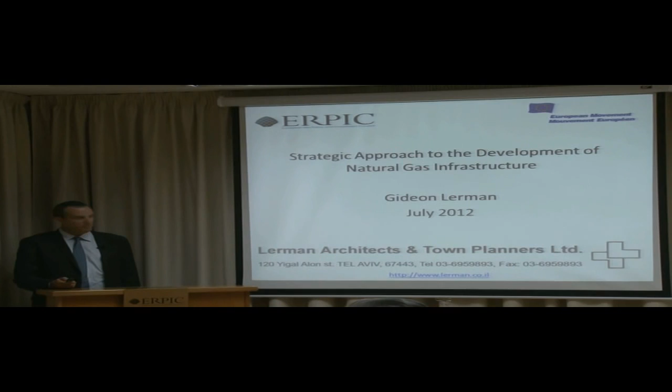Introduced, I'm Gideon Lerman. I'm managing, and I will talk a little bit about the company, Lerman Architects.

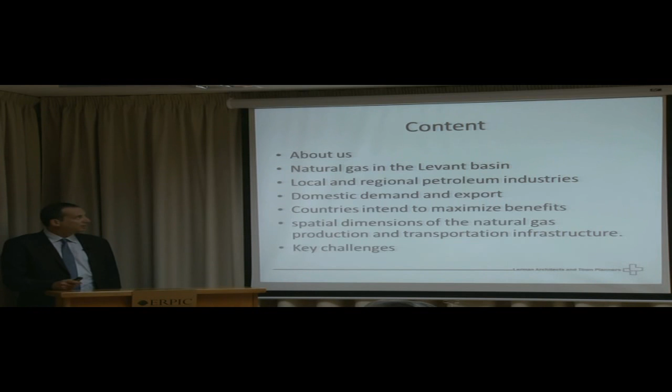The natural gas discoveries in the Levant Basin, local and regional petroleum industries that are developed, the domestic demand and exports, and spatial dimensions of the production and transportation infrastructure.

Lerman Architects was established in the 70s. Our expertise is master planning, spatial planning, infrastructure planning, and strategic development. We are a firm with expertise in consulting to government agencies, government ministries, World Bank, infrastructure development agencies, real estate developers, municipalities, NGOs and industry. We deal with the strategic plan from the place of the idea and how to take the idea and physically

promote it to show that it's becoming a reality on the ground. And we also deal with architecture. The firm was established by my parents, who are architects, and they deal with architecture and structural planning for many years. You can see some of the projects we were dealing with.

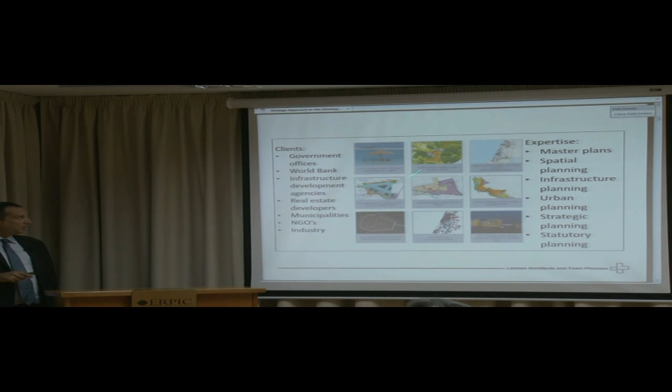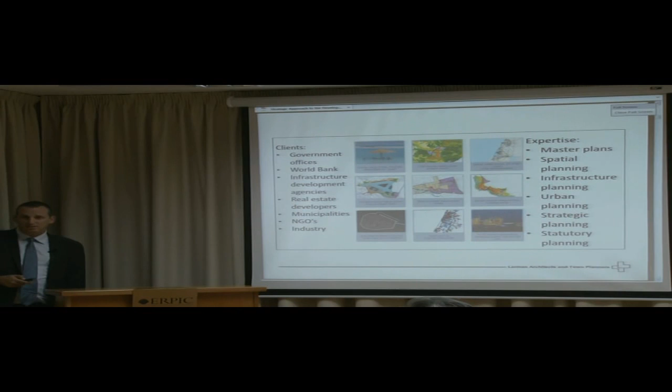Some of the projects we're dealing with are developing airports, like the Ben Gurion Airport, and ports, like the port of Ashdod and the industrial area behind it. I was recently managing a project for the World Bank in Albania, developing a strategic development investment plan and statutory planning for 4 municipalities. We have a development policy for the Dead Sea area. We made a big project on artificial islands offshore Israel. And recently, of course, the gas discoveries in Israel, where we are managing a multidisciplinary team in this field.

As we see, you see several of our projects. As architects, we also design industrial parks, hospitals, etc.

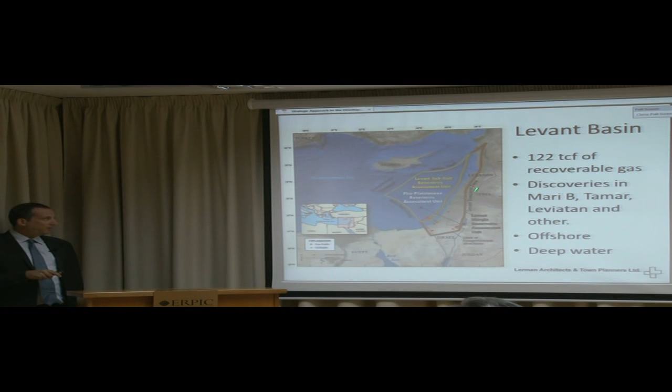I'll talk a little bit about the Levant Basin. Recently discovered, the USGS has found that in the Levant Basin there's about 122 TCF of natural gas. This is the recoverable deposits in this area. The majority is in Israel, some in Cyprus and in Lebanon.

In the vicinity, we have to remember there is another basin with proven reserves in Egypt, which is much larger, and two other basins - one entirely in the economic zone of Cyprus, which has not been explored yet, and the Mediterranean Ridge Assessment Unit, which has not been explored as well.

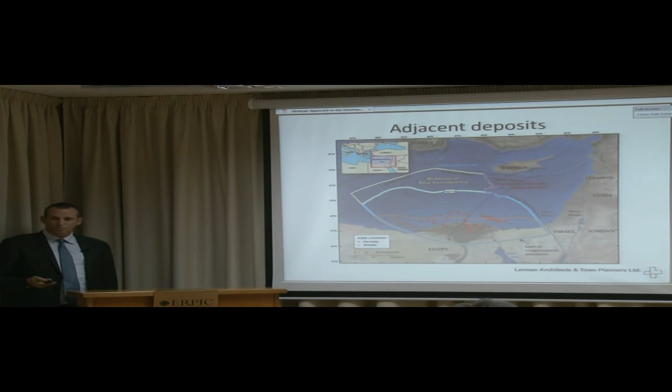What we see is that all this area between Cyprus, Egypt, and Israel has lots of gas deposits recently discovered. There are proven deposits both in Egypt and in Israel, and some discoveries even declared in the Cypriot economic zone. The main characteristic of the gas in the Levant Basin, not in other basins, is that

it's ultra deep water wells. Most of them, as you see, Tamar is about 1,700 meters deep, a well of natural gas. If you remember the Macondo well in the Gulf of Mexico, which is an oil well, it's basically the same depth.

And this is a very complex engineering challenge to utilize the gas coming from this deep water. You need a subsea completion, which is a system underwater, built by robots, using the wellheads and the manifolds that take the gas from the wells to the processing units elsewhere, which are tieback, being located far away from the wellheads.

High pressure of the natural gas and high temperature requires some management, because it's difficult to reach this high pressure to bring it to the shoreline. This high pressure becomes lower and lower in the future, in a few years, because the reservoir starts to deplete. But in the beginning, we're talking about very high pressure.

Capital investment in the beginning is quite high, which is another remarkable characteristic of these discoveries. And the good thing about this discovery is that it's quite good quality gas. From what we know of the gas composition of Leviathan, Mari B, and Tamar, it's very good quality gas. What we mean is there's a low percentage of carbon dioxide, low percentage of CO2, and the gas is considered dry and sweet, which is a good sign for gas.

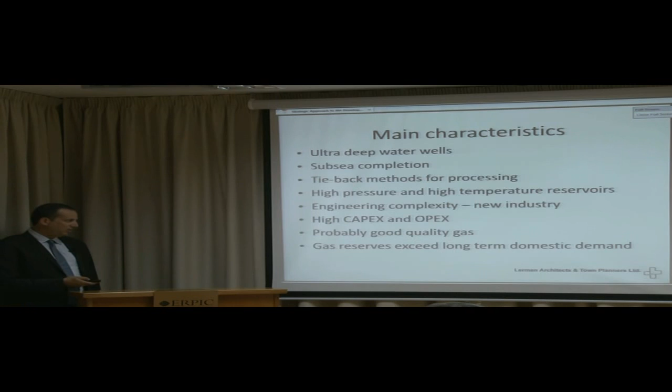The gas, basically, if we're talking about an analogous field, Norway is a good example. Norway doesn't use gas for domestic demand. All the gas it exploits is for export. All their energy comes from hydroelectrical power, so it's a nice example.

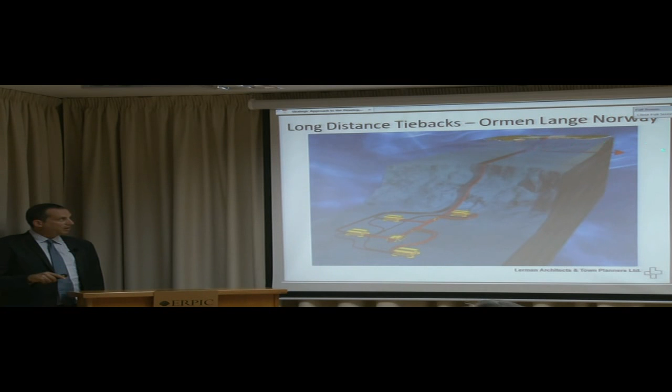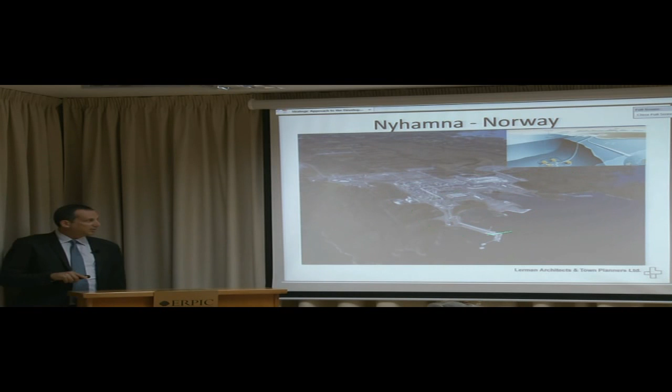The gas is in deep water in the subsea completion, then it goes to a facility which is onshore, and from there gas is exported by pipeline to England and to the European grid. This is the processing facility at Nyhamna in the center of Norway on the coastline, and this is the structure of how it looks like.

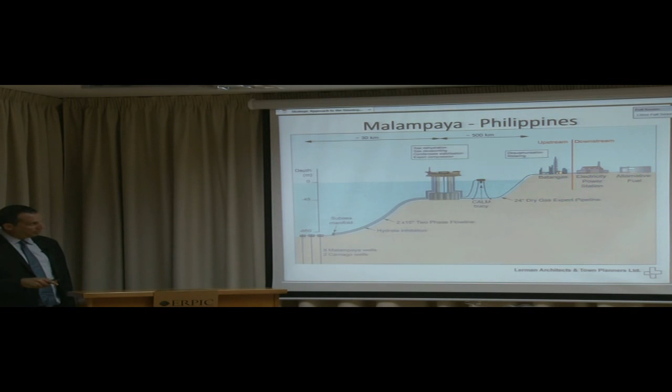This is also a characteristic structure of how this system is being developed upstream and downstream. What we call the subsea completion, which is the wellheads - this example is in the Philippines, but it's the basic structure. Then you have the manifolds, which you saw earlier, and pipelines going to a processing facility, then to finish processing, usually onshore. From there it goes to consumers - in the case of the Philippines, domestic consumers, electricity, and alternative fuel.

What is the processing facility doing? Separating the natural gas from the water and condensate that come along with it. It's a very simple method of treating the gas, which is dehydrating it by cooling, heating, recooling and reheating to meet the sales specification for domestic demand.

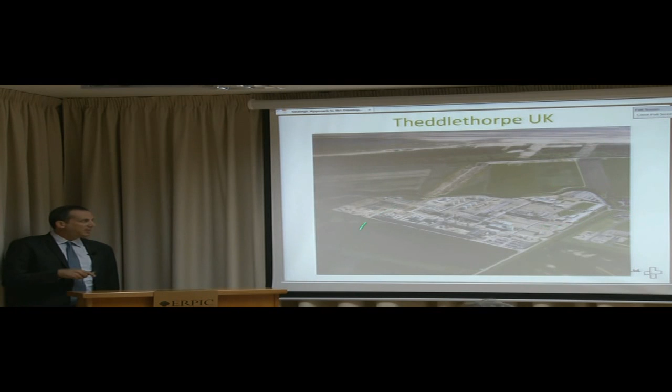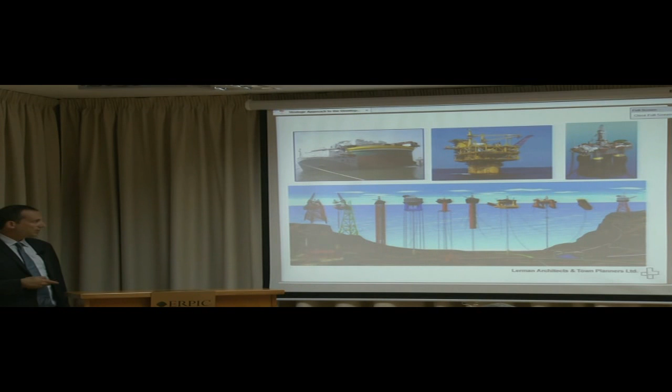Offshore, we have lots of examples of how to process the gas. Drilling or processing facilities are located on platforms, which can be floating or connected to the sea - Mari-B in Israel is this kind of platform. In the Gulf of Mexico, many platforms are in deep water or ultra-deep water and used for drilling - for that, facilities like TLP or spar are used, made for deep water and anchored. Some shallow water platforms use a jacket standing on solid ground. So these are all kinds of facilities used offshore for processing.

This is an example of a field developed for export, a classical example in Pluto, Australia. Australians export to the Far East, where they get the highest prices for natural gas, and they have LNG facilities. You see the wellheads and manifolds offshore, coming to a riser platform, connected from there to the LNG and gas processing facilities onshore. You can see it on the map, basically where it is - it's quite a large development.

The industry in the eastern basin of the Mediterranean is composed of several companies. Here you see Cyprus and the blocks being explored in the economic zone of Cyprus, and also Israel. Noble Energy is one of the main companies extracting gas, along with Delek, Avner, Ratio, and other major companies. In Egypt, you have Shell, which I think was also involved in Cyprus in the past, and BP and other companies working in the Egyptian offshore gas industry.

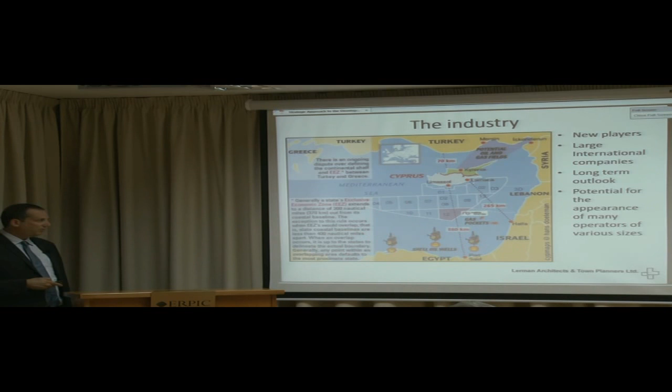The domestic demand is one of the needs - most countries use natural gas for domestic demand, first for power generation. I think Cyprus also thinks they need it for power generation. If there is industry that wants to use the gas, it's much cheaper than using electricity, or for steam or other uses - so they use natural gas.

Also, natural gas can be converted to methanol and DME, other materials very efficient for good industry, and it can be used for transport. CNG can be used for private cars - in many countries it's being used for private cars, and it can be another demand in the domestic market.

In northern countries they use natural gas for heating - every house is connected to a natural gas pipeline in the Netherlands, Canada, and parts of the UK and the US. But I don't think this is the case in Israel or Cyprus, that it's relevant, because it's mainly for heating.

The development for domestic demand requires a transmission system to transmit the gas from the processing facilities throughout the country, so the demand can be spread along the country, and a distribution system that connects the transmission system to the customers at lower pressure of gas. The receiving stations are the stations that process the gas, as I showed you before.

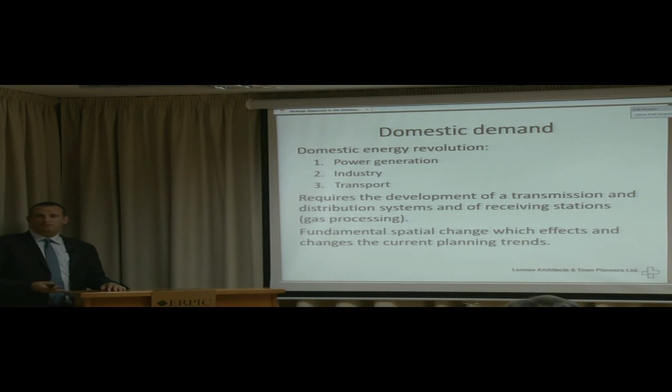As in Israel and in Cyprus, the meaning of the recent discoveries is a fundamental change of the spatial planning system and the planning development that we know today. There's infrastructure for water, electricity, and roads, but not for natural gas, which is hazardous material and has to be considered as such when you develop such a network. It has its own implications on the actual planning in every area. The planning today does not correspond with the needs and requirements of natural gas, and it's a major issue of consideration in the planning process.

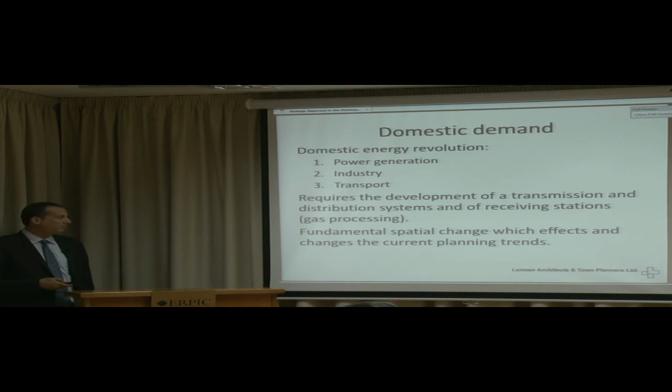So what we have is large corridors of the transmission system and flow assurance facilities. You need to keep the pressure. These are other facilities that you need to find land for, and to see what other uses are around them so there won't be risk to adjacent uses. Also facilities for reliability and redundancy. Natural gas is unlike diesel fuel or coal, which you can store very easily - it's much more complicated to store natural gas for the domestic market. There are also storage facilities, usually underground, in depleted natural gas or oil deposits, which can be used as storage - you pump in the gas so you can use it when you choose.

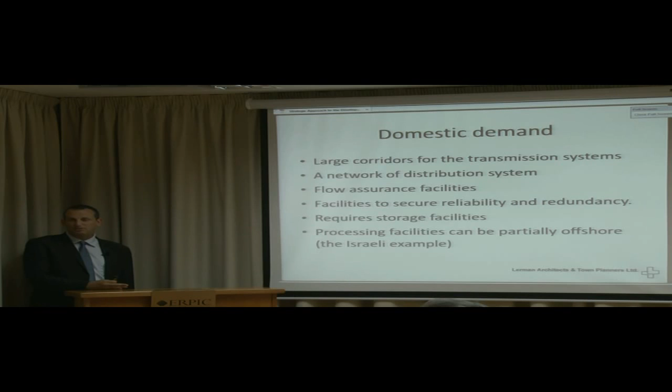Process facilities can be partly offshore. Now I'll talk about the Israeli example. Usually process facilities that take the gas and utilize it, as I showed you before, are done onshore. In Israel, because of public reaction to the attempt by Noble Energy to process the gas onshore, the government decided to explore the ability to process the gas offshore. This is the project that I'm managing.

The natural gas transmission system in Israel is as follows: gas comes either from Egypt today through a company called EMG, or from the Tamar platform managed by Noble Energy, basically at the maritime border between Israel and Gaza. These are the two discoveries that, since 2004, have been actively connected to the Israeli transmission network. Some of it is existing - marked in yellow - and some is planned and under construction these days. There's about 400 kilometers of transmission system, a high pressure system at 80 bars, some of it offshore and some onshore.

From it, there are stations - power stations that take the gas to use for electricity, and pressure reduction systems to connect to industry and other uses. The plan we are doing includes two additional entry points, like the existing ones in Ashdod and Ashkelon, in the northern area. Because of the length of the system and the length of the Israeli state, we need to put a parallel capability in the northern area of the country to supply reliable and available gas for the long term.

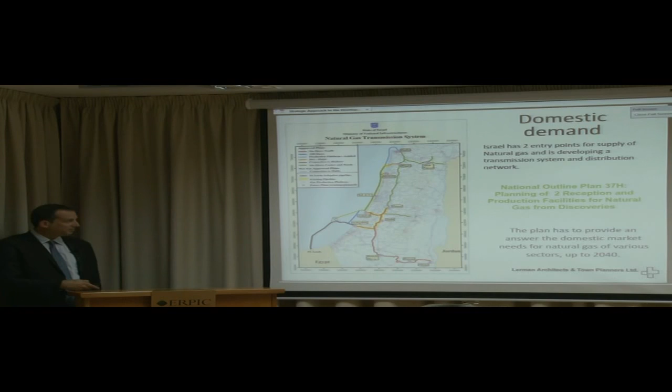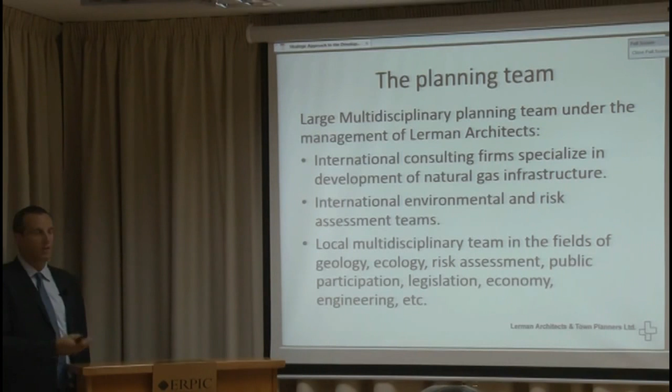The aim of the plan is to provide, for the next 30 years, a reliable and steady supply of natural gas for the domestic market. The planning team I'm managing is a very large, multidisciplinary team composed of international and local consulting firms covering various issues, from engineering aspects to environmental aspects - we are doing an environmental impact assessment of the project, a strategic environmental assessment, and we also have PR and public participation experts as well.

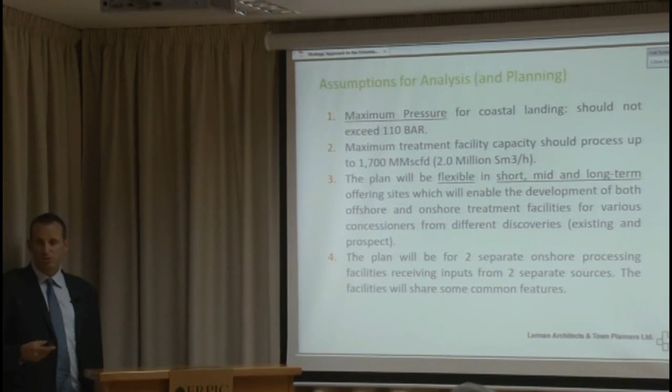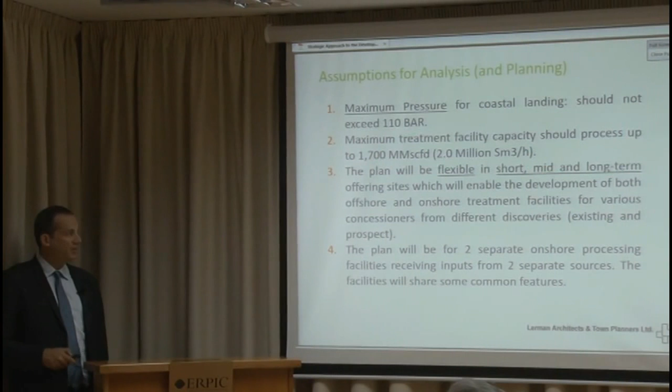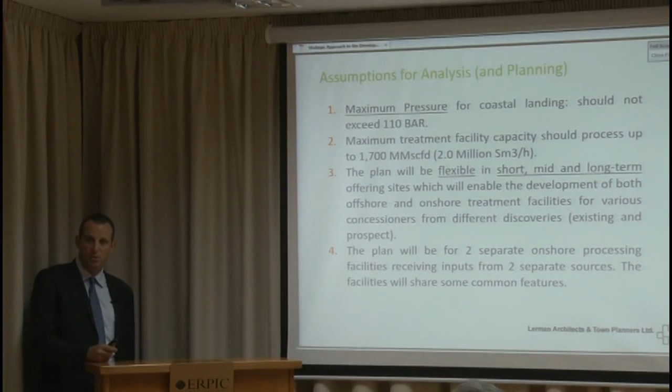The conditions we used for the planning are that we control the pressure offshore because it's high pressure - we control it offshore because of the public outcry over trying to bring high pressure gas to shore, which is the main risk factor in natural gas treatment. We're talking about a very high capacity gas processing facility, capacity of 2 million cubic meters an hour - about 48 million cubic meters a day. It's roughly one of the largest treatment facilities in the world of this capacity. So we're planning for this capacity as an upper threshold for development in Israel.

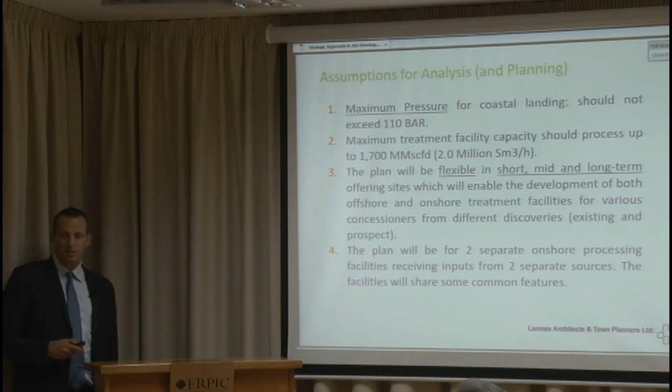We're looking at a plan that will deal with current concessionaires exploring and drilling offshore Israel, and future concessioners—everyone who finds gas and tries to utilize it in the next 30 years. They will have an answer from a statutory point of view of where to put the facilities, how to connect them with pipelines, and how to distribute for the domestic market.

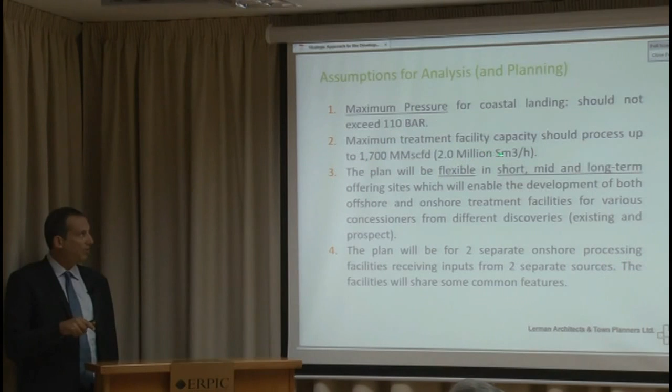We're talking about 2 separate facilities for this kind of capacity, and I will show you basically what we're talking about. Each one of them is for more than one concessionaire.

You need a flare area to vent the gas if you need to, in case of some emergency.

The condensate is an essential part of processing the gas, because if you don't have enough storage facility for this condensate and you cannot market it to the industry, then you have to stop processing the gas because you can't utilize it.

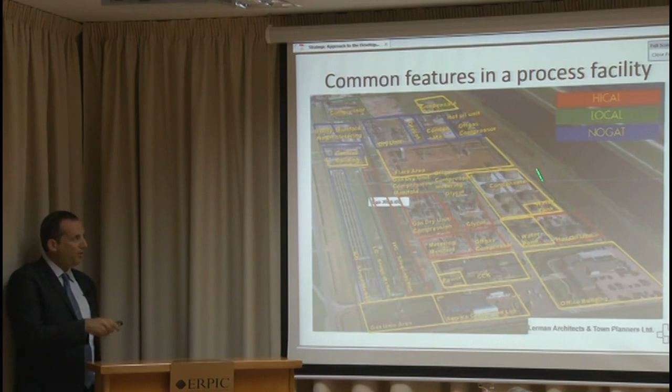The plan will supply the treatment for all the pipeable products. It also covers produced water—the gas comes with water, and you have to dispose of it. And the amount of condensate, as I said, can be pretty high—about 100,000 barrels a month for this facility.

That's quite a lot. These are examples of the facilities we are planning offshore and onshore. The facility could be planned entirely onshore; however, because of the public outcry and the density in Israel, we are looking at offshore options for processing.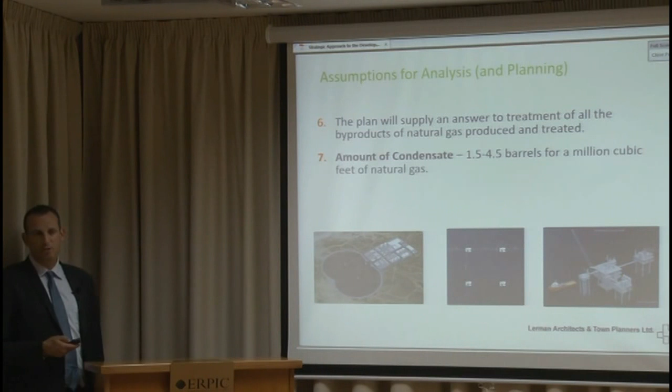It's quite unique. Most countries that do offshore processing do it purely from an economic point of view, not because of pressures from the public. In Israel the situation is different. Israel is not the only country doing this, but this is the solution chosen for Israel.

So we made this solution as a schematic outlook. There are the gas discoveries, for example Tamar or Dalit, which is a much smaller field, located far from the territorial water in Israel. The legislation system in Israel differentiates between the territorial water and the exclusive economic zone, which are 2 different legal entities, so we deal only in the plan with the area within the territorial water.

Every concessionaire who finds gas can be connected with the corridor to the facilities which are offshore and can do partial treatment. From these facilities, we will go onshore to complete the treatment in the most reliable way, in certain designated areas. This onshore area, because it's partial processing, doesn't necessarily have to be on the shoreline.

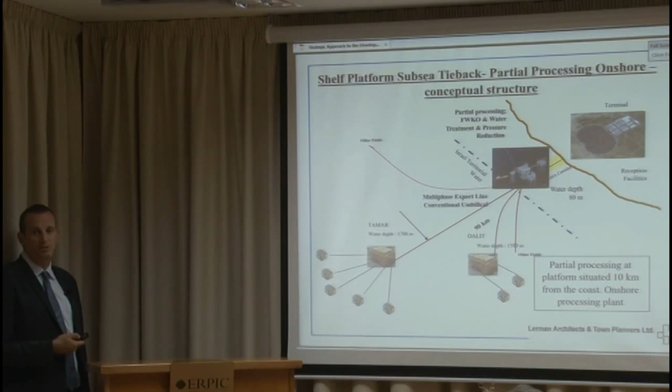It can be even 10 kilometers east of the shoreline, even more. The question is whether you can find the right corridor to put all the pipelines between the coastline and the facility inland—and it's possible. It's not possible in the case of LNG, but for processing gas for domestic use, it is possible. We looked at several alternatives of locations.

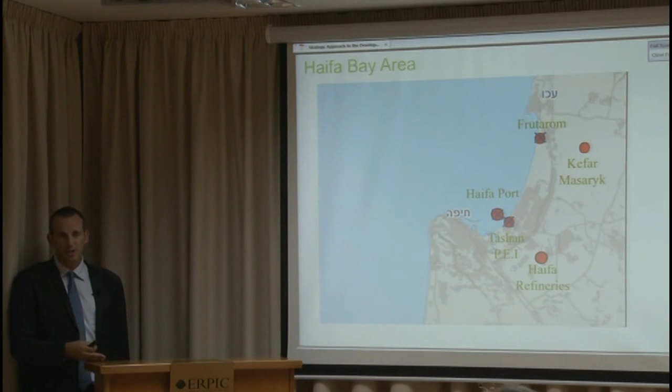One issue the residents consider very important—and as I said, this plan was originally made by Noble Energy, and because of the public outcry, the government took it under its responsibility, and I was nominated to manage this plan. So the first thing we did was start evaluating other options, in case the ones Noble selected were not the best. So we started looking at and eliminating options suitable for gas processing facilities all over Israel.

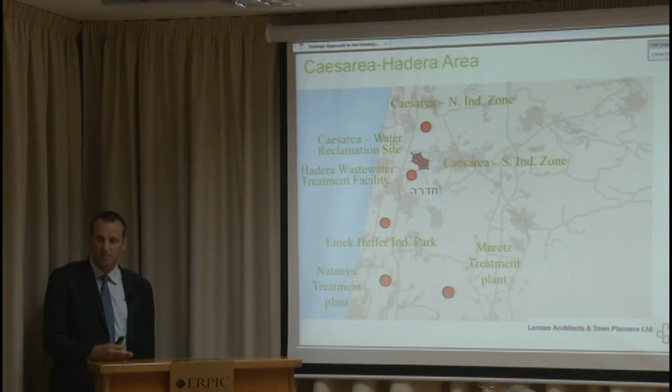We tried to look at about 25 facilities. Now we've downsized it to 4 that are going for the environmental impact assessment. However, we started with 25 facilities.

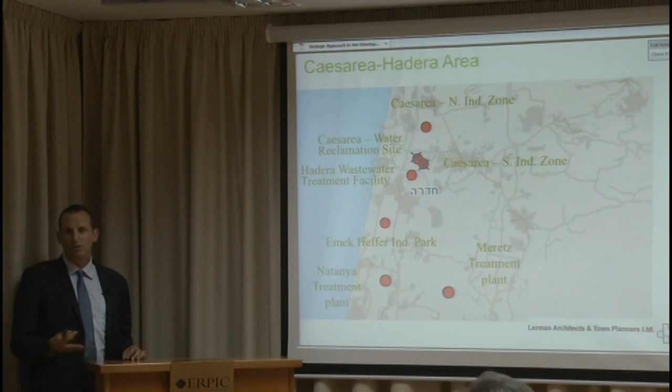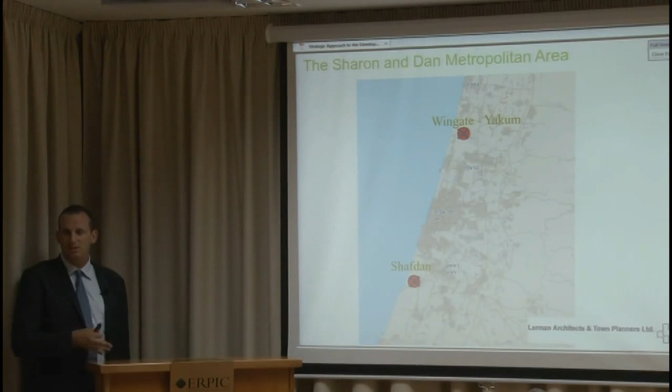We didn't say there's one facility which is the best, because from a judicial point of view, the court ruling is that the plan has to consider alternatives. This is an important issue, and that's why the court was supporting the residents against the development made by Noble Energy. So we looked at several facilities, then started considering offshore options.

It's not simple at all to put offshore structures. You have to see if the soil is stable enough. In the coastline of Israel, the Levant Basin is not stable.

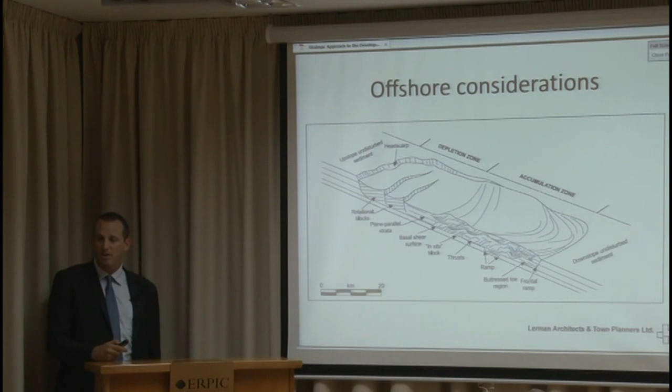What is happening is there's a salt layer. The gas was basically condensed beneath this salt layer that holds it and keeps it as deposits. All the deposits we're talking about in the Levant Basin are pre-salt deposits, under an underground salt layer.

This salt layer can be pretty thick — in Leviathan it's about 1 kilometer thick. Oil in the world is usually found beneath the soil, beneath the salt. The salt is the material that sealed the ground millions of years ago and doesn't let the gas evade to the atmosphere.

However, after the salt layer was developed, clay layers and sand layers were laid on the soil, and these layers are sliding all the time, becoming deeper and deeper in areas further out. We can see this here.

So putting a facility on a platform with 4 legs in an area next to these slides will make it fall down in the first earthquake, like we saw 3 days ago. It can fall down, and it's a very challenging engineering issue.

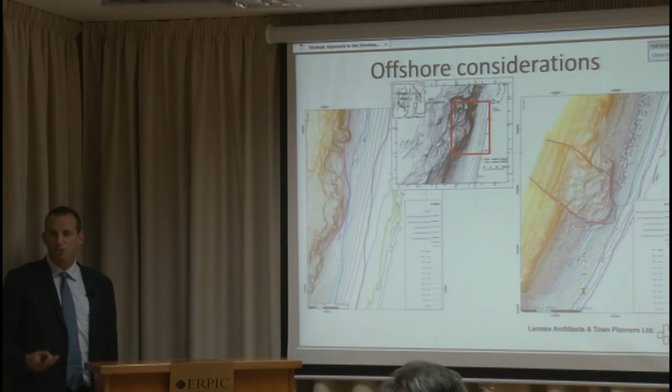This is for domestic use. We made a map of areas that are more risky — you see them in red, and in yellow less risky, and of course close to the shore it's much less risky for putting gas facilities.

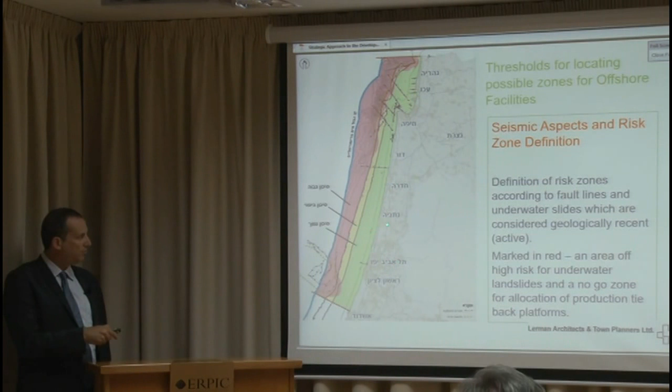However, the gas processing facilities are quite big, and they need some safety distance between them and other offshore activities like sailing or maritime paths. So you don't want to put them next to the shoreline — you want sufficient distance between the shoreline and the facilities.

That's why we were looking at several areas about 7.5 kilometers from the shore, and not in the area marked in red, which is dangerous for offshore facilities. We were selecting several areas for more detailed evaluation.

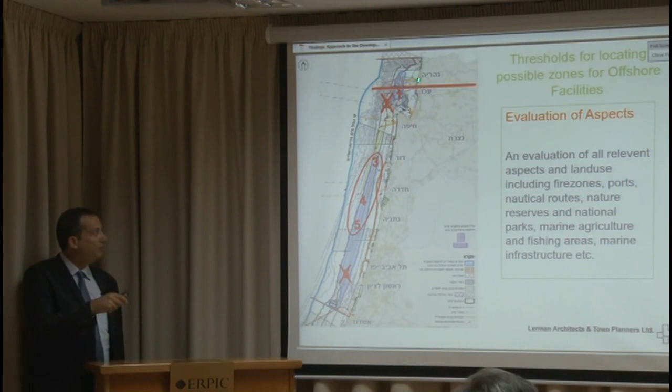If possible, we will finally select 2 of the 4 sites mentioned in this area for offshore facilities. This is the main delay of this project today in Israel — finding if these areas are suitable to hold offshore processing facilities.

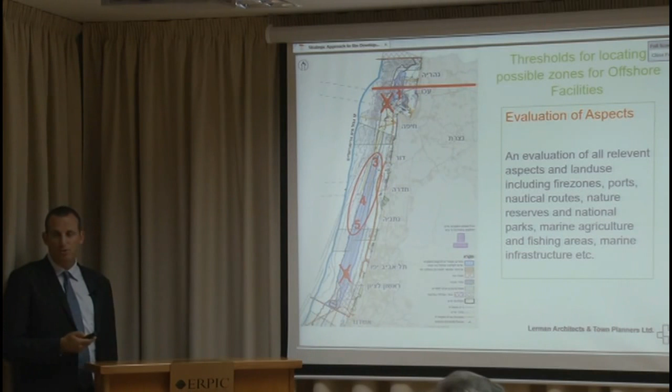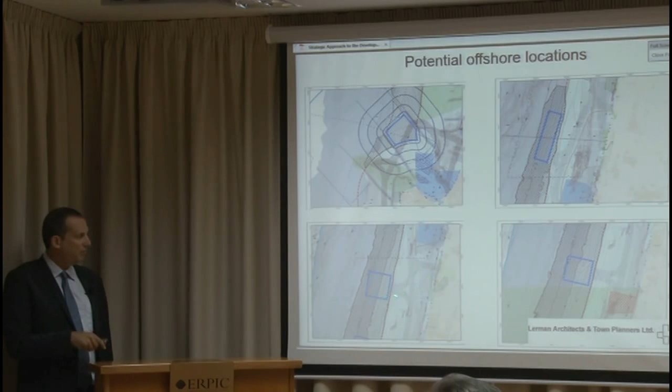It's a small artificial island that weighs quite a lot. This is a map of how you put these facilities and connect them with pipelines from the facility to the shoreline. So these are the areas we are now considering for offshore.

If we're talking about export, export is more complicated than domestic use. You have to explain why you need to export it, and understand what the decisions and conditions for export are. This is the Tzemach committee in Israel that sets the conditions for what is allowed to be exported, and under what conditions.

Not everything is exported from Israel — I'm talking from the Israeli point of view. Some is exported, some of the gas will be used for the domestic market. The Tzemach committee says you have to assure that domestic demands will be answered for the long term before you can start developing schemes for exporting natural gas.

Exporting always has some effects on the domestic market. Either, like in Egypt, the export is from the domestic market - the gas, the transmission system provided Israel with gas. Not now, but until a year and a half ago, Israel was connected to the Egyptian transmission system.

Another issue is small field policy. It's not dealt with directly today in Israel, but in the Netherlands, Norway, and other countries it's a very important issue. If you find a big field, it's very profitable to export. But what happens with concessionaires who find a small field? It's ultra deep water, high capex, and you need to find how to utilize the small fields rather than give them up, because 6 or 7 small fields are like one big field. If we look at the Gulf of Mexico, the North Sea, West Africa, or Australia, after you find some big fields, you find quite a lot of small fields.

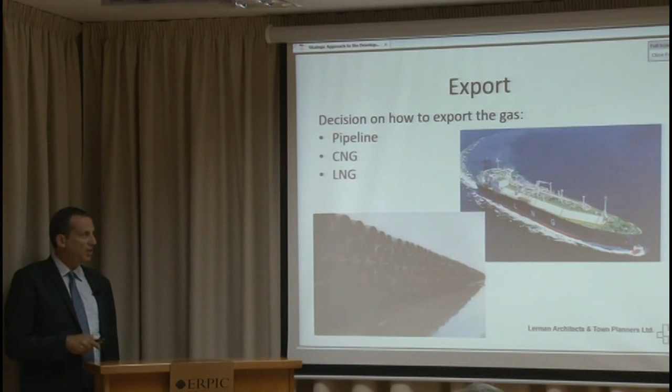Export can be done mainly in 3 ways: pipelines, CNG - compressed natural gas, and LNG - liquefied natural gas. Pipelines are just pipelines coming from one place to another. LNG and CNG are exported by ships. Pipelines are the cheapest method of exporting - when you find a route and a customer, it's the cheapest way. You can export it directly from the local transmission system; you just need some compressors.

Then you have to see if the area is suitable for using this gas. If you export by pipeline, you increase the reliability and redundancy of the domestic transmission system, because you don't have issues like swing and other issues that control the domestic market and affect prices and the development of facilities for flow assurance.

This requires feasible offshore routes. If we're talking about Israel exporting to Greece or Europe, it's very difficult because the water depth is too high for putting pipelines today. And if there were a pipeline, it would have to be either inland - then we'd have to make peace with our neighbors, impossible - or offshore, where we'd have to agree with the Turkish government, which also looks quite impossible. I'm talking from the Israeli point of view; I don't know enough about the Cypriot point of view.

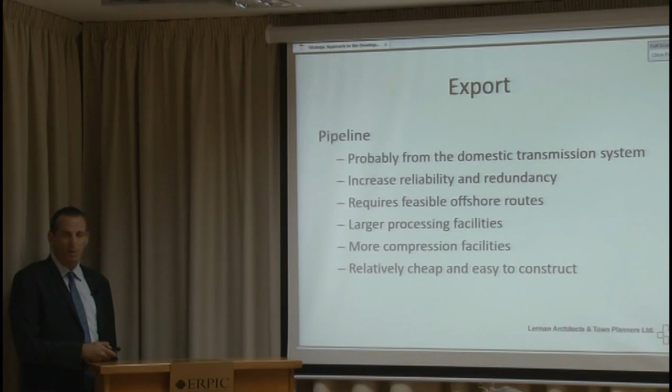Of course, the processing facilities used to process the gas have to be considerably larger, and there will be some compression facilities. Compression facilities are the most expensive facilities in the life cycle of natural gas deposits - they use a lot of energy and have to be changed from time to time, so they're quite costly. However, a pipeline system for export is relatively cheap - the cheapest way of exporting gas among the possibilities.

Another possibility is CNG - compressed natural gas. You compress the natural gas into ships, which you can do from the transmission system with the right compressors. You need a loading port, and you have to connect the boat that takes the gas from the pipeline and compressors. You also need proximate customers - this is a very important issue, because you cannot sell the gas for long distances; it requires proximate customers.

It's cheaper than LNG. Development is much cheaper than LNG. When you're talking about small quantities of natural gas, you can use compressed natural gas as an alternative. Basically, it's a very long pipeline. This is a system. Compressed natural gas as export was never used before.

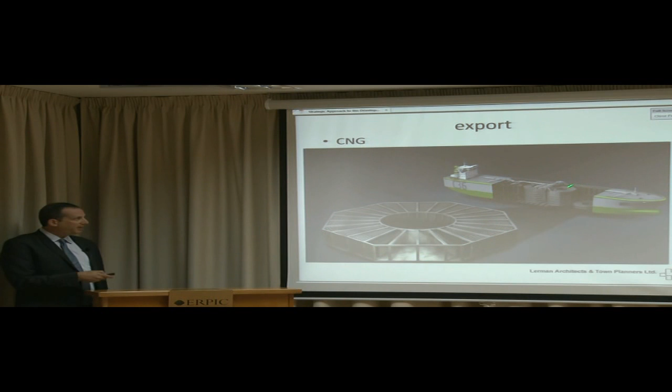Mainly compressed natural gas is used for transportation systems. Cars take natural gas at a pressure of 250 bars, which is much higher than the transmission system. However, you can take the processed gas and put it in some kind of magazines like this. These magazines are inside the ship, a very normal tanker, not different than any normal tanker. It can be built, and there can be a processing facility even offshore to process the gas.

The company that I met said they can do this, and I heard several companies who can do this, gave the costs of transportation for 1 million BTU. For 350 kilometers it's about $1.46 per million BTU. As I said, they never tried it, but they developed it to a structure that can be developed. They have a DNV assurance that they can develop this, so the banks can finance these projects as feasible.

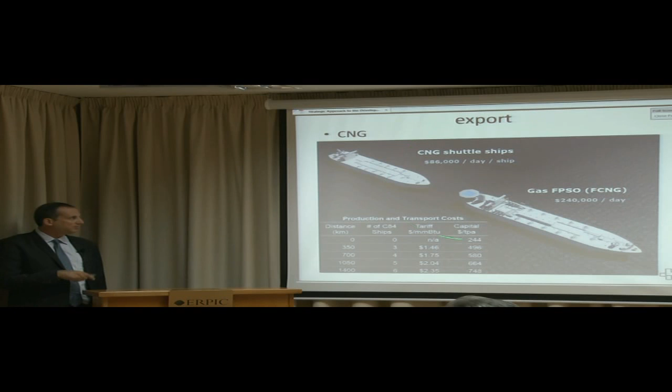What is important to understand about CNG is that it can be used by a floating production vessel, converted to FCNG. It's compressed into a pipeline. As I said, it's a pipeline, and it's less sensitive to the quantities. LNG has to be processed to a very high level of clean gas, with no other materials inside, no water, no condensate, also no CO2, mercury, or other materials like carbon dioxide.

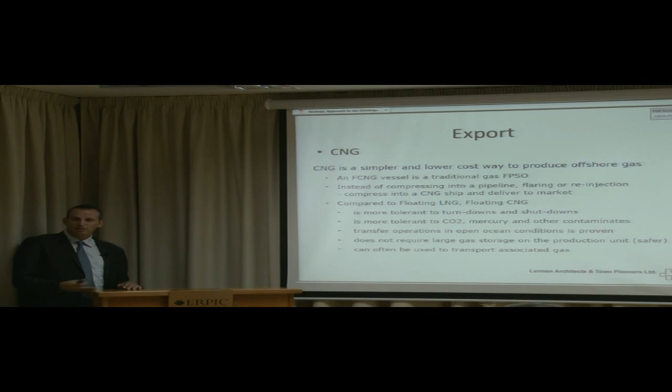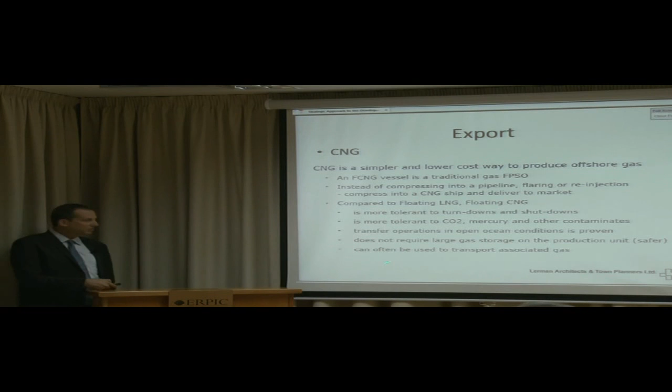And the vessels using this can bring LPG or CO2 for other uses, can be used in the same transport system. LNG, which is the most known method of exporting natural gas, has high capex, a more capital intensive investment, even before construction. So the issue is considered very suspiciously by financing bodies, whether you can do LNG or cannot do LNG.

The best thing to remember is economies of scale. You need a lot of deposits of gas around an LNG facility to make it feasible. The facilities are located on the coastline. You need an offloading ship or an onloading ship at a receiving station, but the facilities are located on the coastline. You don't have the benefit like in a processing facility to put it far away from the shoreline. In Israel, it's a big issue because there's hardly any vacant land on the coastline.

The market or the companies that build LNG facilities are highly conservative. They are very suspicious of geopolitical issues, and also when dealing with deep water deposits, they take it very suspiciously whether it's possible to develop these LNG facilities in an economically feasible way, because the cost of extracting the gas from the sea and treating it with an LNG facility, in total, can be quite costly compared to Qatar or other countries that have gas on shallow water and large facilities for exporting, just as an example.

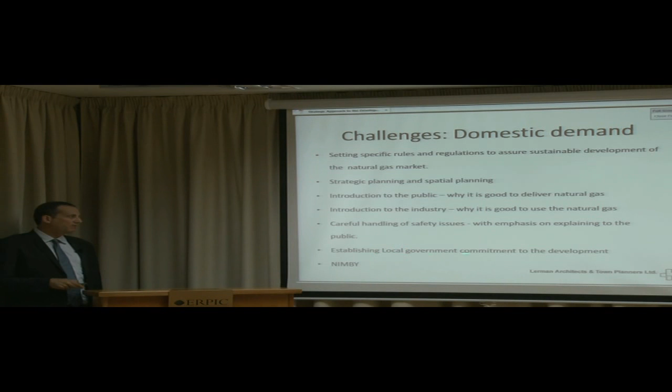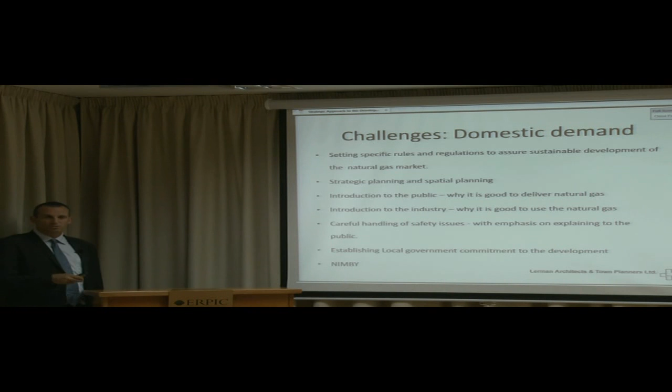Establishing a local government commitment is also essential. In the end, you have a facility in some local council or a municipality, and the municipality has to understand what are the benefits that they are going to see from this facility, which is serving the nation as a whole, and not the local council in particular. The main issue is NIMBY.

This is an example of a gas processing facility in Ireland. The gas processing facility was built 9 years ago, and it's still not connected to the shoreline. It's 9 kilometers from the shore. These huge demonstrations - people get arrested - and this is quite a derelict area.

However, the people in this area - I'm talking about 2009, 2010, after the economic recession - everybody understands in Ireland that there is a lot of economic benefit from using the natural gas for domestic use. Shell, which is one of the biggest companies in the world, has tried to develop it, and for 9 years they don't manage to connect this facility to the shore because of the public protest in the area.

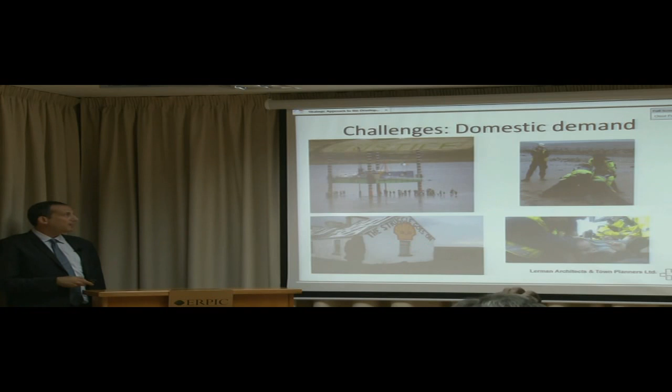Same thing happens in Israel with the project. I'm responsible all the time. Every planning meeting that we have, there are demonstrations outside of people who are very much concerned about the possible problems. This is why also the Israeli government is reluctant to deal with the issue of exporting gas.

This team that was here was against Noble Energy's project, and now they're fighting against the project I'm promoting, and they have direct access to ministers, to parliament members. They affect their opinion, and then we have to follow them up, and everyone they meet, we have to meet them again to convince how important it is for the government.

But on the local government basis, every mayor or every municipal council head is sure that if he allows or collaborates with us, or allows the facilities to be developed in his vicinity, he will not be re-elected, and they are certain about this issue. That's why it's very difficult.

The challenges for exporting are much higher, because then it's not for the domestic market. It's not that you can tell the people that it's going to be cheaper for them, the price of the electricity. You have to explain why and how they profit from the export.

And then the issue of how to allocate the right area for the facilities has to take this consideration into account - whether there was a right explanation, whether this was explained well or not - it's one of the issues that the planning process has to take into consideration. For me, in my experience, local councils and areas that Noble has tried to develop facilities in are much more hostile to me and to the development than other local councils where I introduced the idea of putting processing facilities within them.

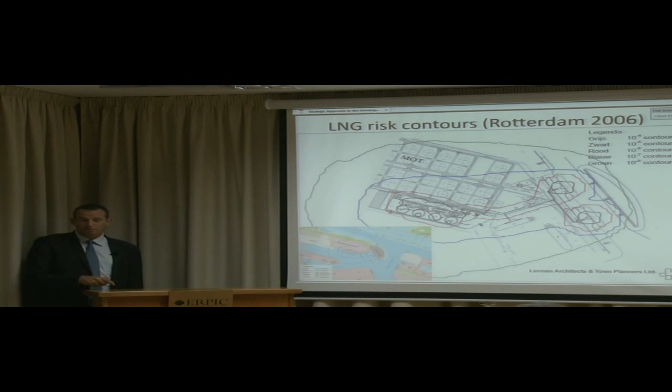And this is only for an LNG tanker, not a storage facility. In reality, this is the LNG tanker, this is its size. So you see that the size and the contours are much, much smaller. They exist, and they have to be taken care of very carefully, but it's a different story than the public outcry.

In conclusion, immediate identification of stakeholders is essential for the success of the plan. Stakeholders are not only the public, it can be government agencies, it can be other stakeholders. I hear that in Cyprus the church has a lot of land - it's definitely a stakeholder. Property issues here are dealt with very carefully, as I saw in the brochures that everybody reads on the planes.

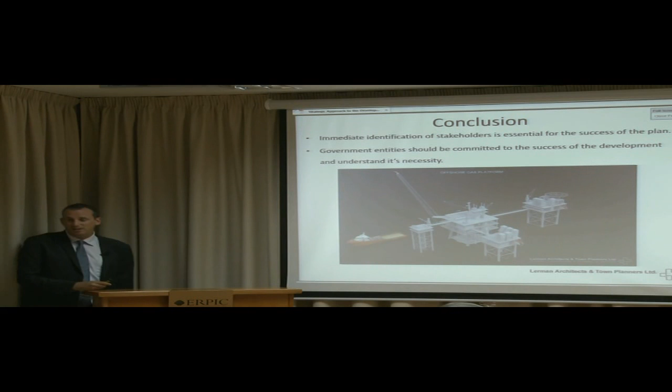Government entities should be committed to the success of the development and understand its necessity. It's another thing if the Ministry of Labor, or whoever is responsible for safety, says that this is dangerous - then the economic ministries trying to promote this facility will not be able to promote it. So first the government has to agree on the set of rules and guidelines to develop it, and then go to develop it and show it outside. It's another precondition for the success of fast, rapid development.

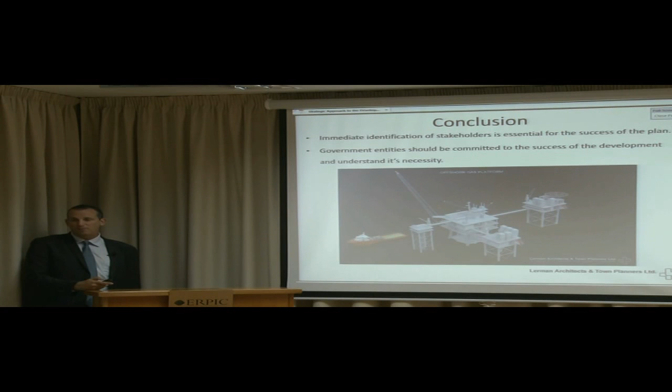As I said, the natural gas discoveries are a great opportunity, but need careful and considerate planning that is essential for the development of a healthy natural gas market that serves both domestic and international customers. And this is the end of my presentation, so thank you very much.